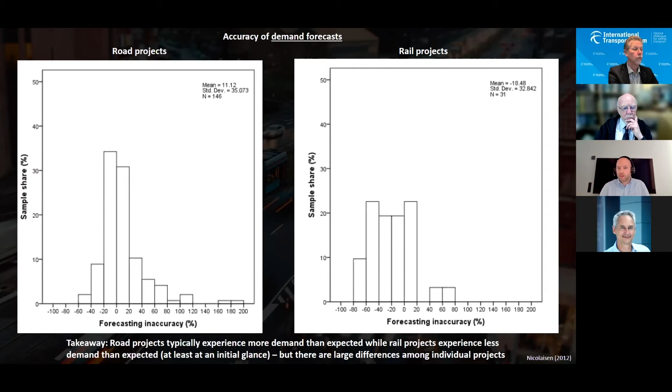And it should be obvious that makes it rather difficult to use the consequential environmental analysis and not least the cost-benefit analysis as a valid measure of decision-making on the economic impacts. For rail projects, the converse is true. The average is negative, indicating that there's on average less ridership on rail projects than we tend to forecast, but also here the deviation is rather large.

So some projects fare rather well, while other projects have as low as, I think, 20% was the worst project I encountered in my own studies, 20% ridership compared to forecast, which is obviously disastrous for the economic feasibility of such a project.

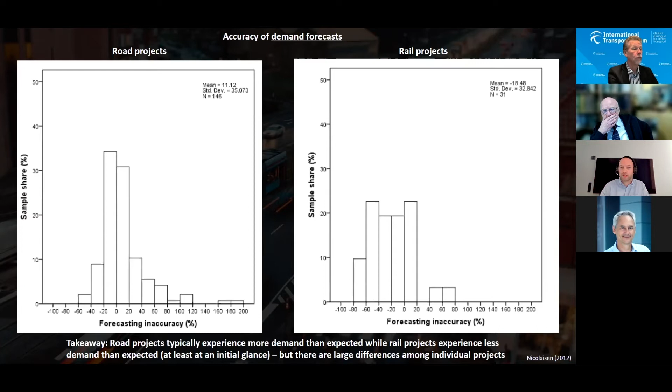One thing that I was quite interested in when I was doing my study, and which I haven't seen replicated in many other studies, is exactly what Tom was talking about. What about the counterfactual? Not that I can claim to have any detailed explanation of the causality of these forecasts, but from a range of projects that were either postponed, abandoned, or just not completed at the forecast target year, we had an opportunity to compare how accurate the forecasts are for the zero alternative or the no build alternatives.

And it turns out that opposite of the completed alternatives, we have a negative mean for those values, indicating that on average we have less traffic developing in the zero alternatives than the forecast actually shows. I think an obvious explanation is that we are not particularly good at assessing induced demand effects, since there is a tendency for more traffic to develop on roads after completion than expected, and conversely, less traffic on projects that are not completed.

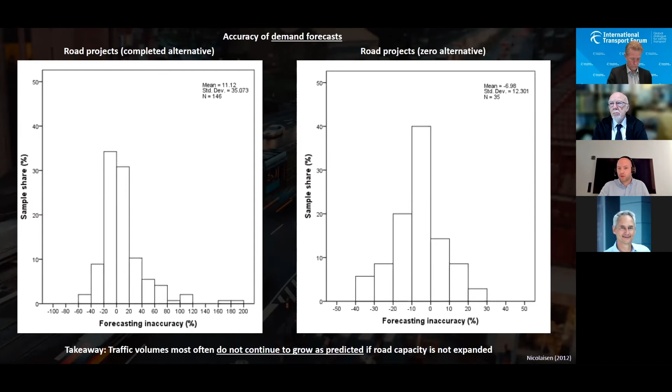I think the interesting part about all this inaccuracy or uncertainty, and the large deviations from expected values when we look at completed projects, is not so much the demand forecasts themselves, but what happens if we feed that into, as Morten was saying, a full ex-post evaluation of a project, which is, I should say, rather resource demanding.

But the UK Highways Agency has for a number of years had a program called the Post-Opening Project Evaluation of Major Projects Scheme, POPE in short, that has done exactly that. At least it did when I was last invested in the research portion of this.

And one of the things they've spent some time on is trying to redo the cost-benefit analysis with the outcome variables of projects. A sample from projects completed a decade ago is what you're seeing here, indicating that the travel time savings, by and large the dominant benefit factor of road construction, tend to deviate quite largely from the expected values. Only 18% of projects are actually within plus minus 15% of the expected travel time savings.

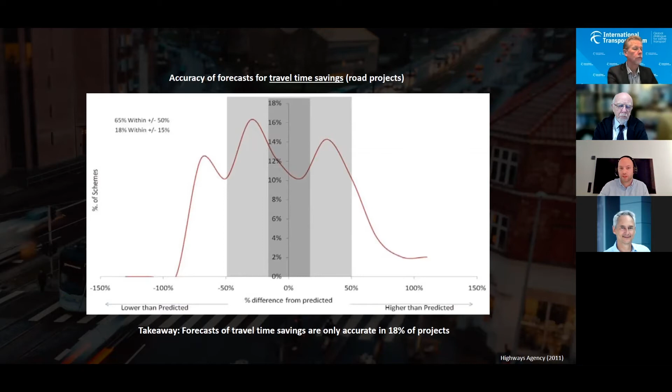Even 1/3 of the projects lie beyond plus minus 50%, which underpins the fact that these large deviations in travel demand forecasting also have quite a critical effect on the assessed feasibility of projects in economic terms. The same holds true for other types of impact variables.

Another important one when we're talking road infrastructure being accident reduction rates. I think this graph essentially goes to show that it's pretty difficult to use the assessed accident reduction rates from appraisal of projects ex ante to compare the viability of projects, given that many projects actually fail to achieve any reduction rate at all in terms of accident rates, despite it being perhaps one of the crucial elements for deciding to undertake the project.

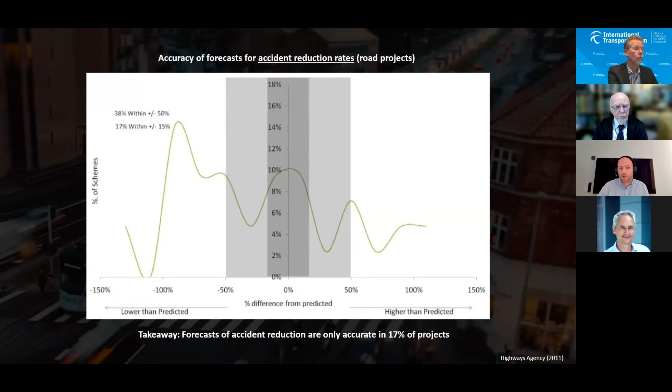A final sample from the UK Highways Agency meta-analysis from a decade ago is that all these sub-objectives that I think Morten was also touching upon, that are quite critical to at least local decision makers, often are also having various degrees of robustness when we compare them with the predicted values.

And my new role in local governance is, as Roger said, heading a team working with green mobility. So we are obviously quite interested in forecasting the greenhouse gas effects of various types of initiatives that we put forward to our policymakers. And sadly, that has proven to be, at least from the UK experience, the most difficult sub-objective to actually get accurate predictions for, making it rather difficult using travel demand forecasting as a basis of advising policymakers on how to best reduce greenhouse gas emissions in the transportation sector, on a project level at least.

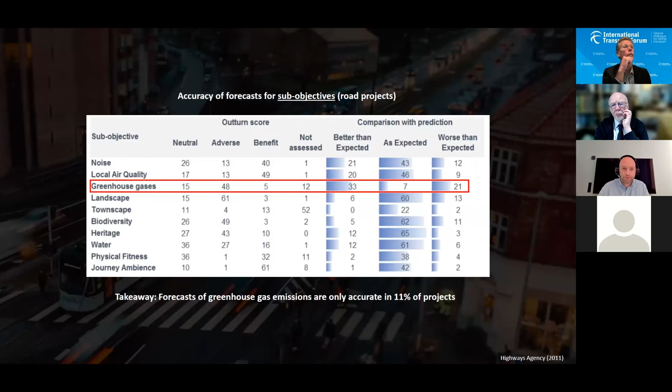Another thing that makes it tricky to utilize ex post evaluation results, whether some that you have conducted yourself or taken from academic or more practical studies, is that this initial rather simple measure of inaccuracy that I initially presented ends up proving difficult to utilize in practice. A simple reason for that is that often the prediction is made, let's say 2020 for a project, time goes by, the project opens, could be in 2030, but the target year for the forecast might not have explicitly had in mind any realistic opening year. That's typically the case for Danish rail projects, at least.

The target year is typically set for a year well in advance when you know there's likelihood of having a mature system and the project is likely to be finalized. It could be 5 years after the actual completion date. So a direct comparison of the forecast ridership and the outturn ridership is likely to result in a ridership shortfall simply due to the fact that you're measuring an opening year that's prior to the actual target year for the forecast. Could also be the other way around, in which case you'd be likely to have the opposite inaccuracy bias, you could say.

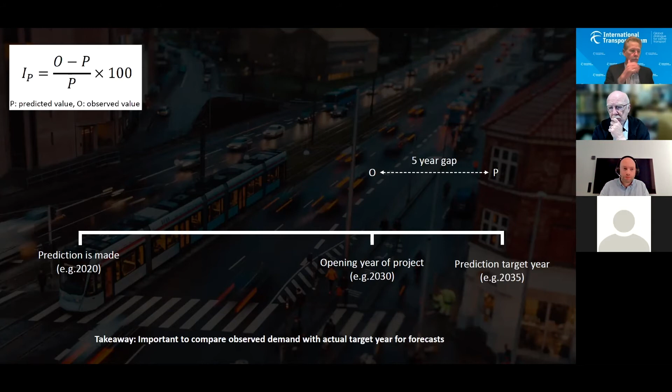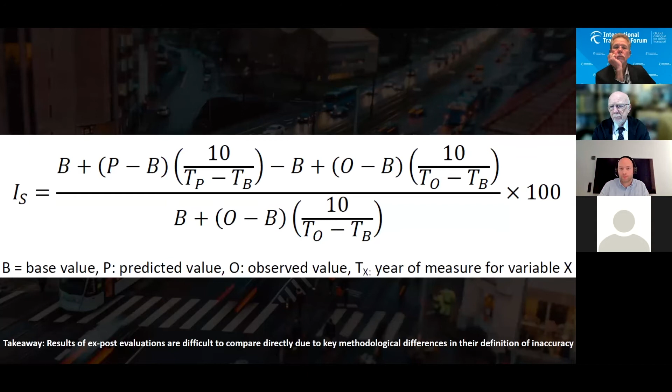The point of this is not to go into detail with any of these formulas. It's more to say, as Morten also hinted, that the experiences from one country or one study can be rather difficult to translate directly to projects that you find yourself being responsible for if you do not know or do not utilize the same measure of inaccuracy. And it is not always straightforward to even determine what measure of inaccuracy has been used. Remedies for these things is something I'll return to a bit later.

Another thing, as I think several people in the prior session before the break hinted at, is that ex-ante appraisal can be resource demanding, but ex-post appraisal can be equally resource demanding. So what often happens is that ex-post evaluations focus on ridership for a rail line on a specific segment or traffic on a road network on a specific segment.

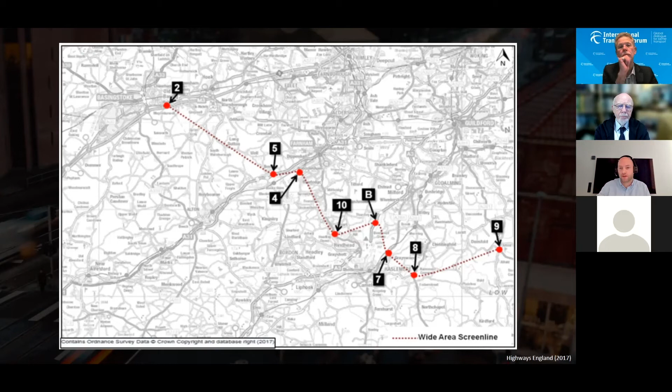But what ought to be done is essentially looking at, as in this case here, a screen line across a corridor. In this case, I believe it was a project on the A3 in the UK, looking at not only what is indicated as location B here, what happens on that specific segment of a road upgrade, but what happens on comparable corridor networks across the range of this corridor. And this is the comparison between expected and actual traffic on these different locations.

And I think what happens in many studies that do not use the screen line approach is that you end up with something that's indicated by yellow here. At location B, you had a pretty high induced demand effect of this road construction project. But when you start looking across the screen line, you notice that in total the effect on traffic in the wider area was actually not very drastic because it's simply a diversion of traffic to other modes.

And I think Morten was also hinting on this, that it's difficult to find evidence supporting that there's a large growth factor to these road infrastructure investments, simply because it's typically a competition between either local or regional authorities on attracting this growth.

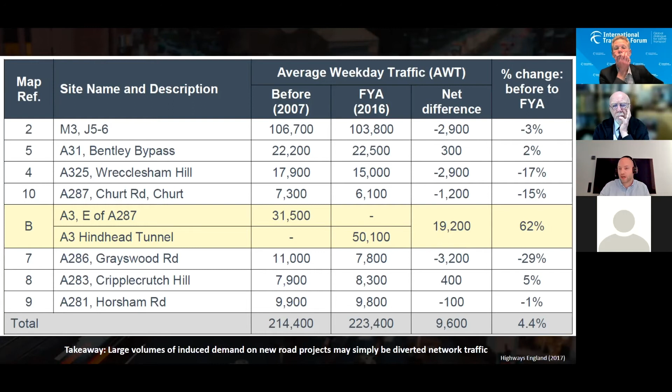The problem is that if you have studies that are comparing the inaccuracy of travel demand forecasting for road projects, you could utilize a project or a single corridor or a single segment approach and reach the conclusion that the travel forecast was largely underestimated by quite a drastic amount. But if you use a screen line approach, it might turn out that the forecast was pretty much spot on, or at least that it did not have the large amount of induced traffic that would otherwise be indicated.

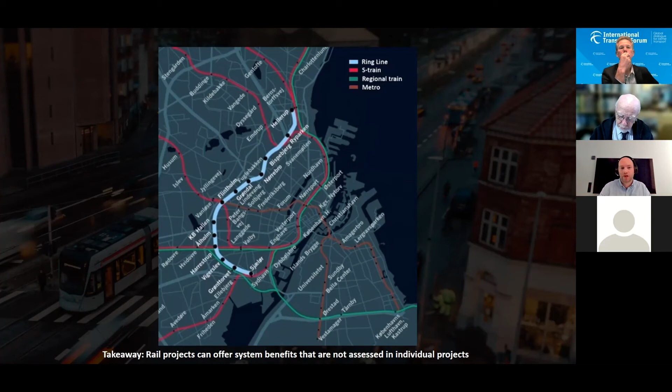But if you look across overall service levels in the Copenhagen rail system, including the metro system, it was a massive upgrade simply because the amount of alleviation on the passenger stress on these other lines was still sufficient that they are now operating at a much higher service level, much higher levels of reliability. So I think an assessment of the overall impacts of such a project would be quite positive, but a simple measure of just the ridership impacts and the financial viability of the corridor itself that was upgraded would turn out to be rather negative.

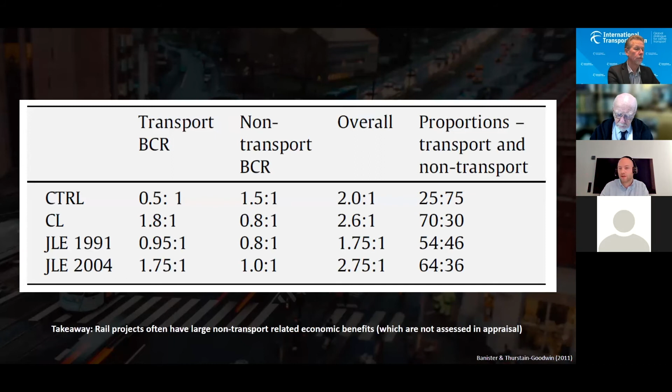And I think that's something that other speakers have addressed, so I won't speak more into that. But obviously, it's important for adjustments to the way we do ex-ante appraisal. I think Morten also hinted on this, that when you're talking about rail lines, they could be exceptionally complicated projects because they depend on so much more than just the infrastructure, service levels, among others.

And after the project was built, it turned out the ridership is, I think, 8% on this station compared to forecast. But when you look at Kildedal Station today, you'll see that there simply has been more or less no development investment compared to what was forecast.

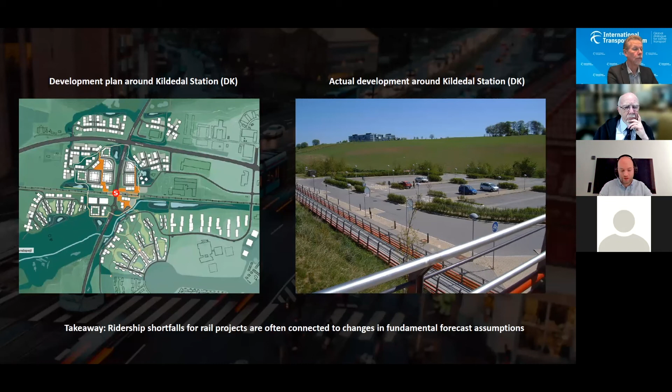We are running the same risk with a recent light rail completion as an expansion, you could say, of a high capacity network we're doing here in Aarhus. This is just north of the city, essentially a station placed in a greenfield development. Right now, we are finalizing plans for essentially an entire new city up here. But we are still crucially dependent on nothing going wrong, you could say, in the investment discussion with private real estate developers in this area.

So we have the light rail, we have the station, we have all the sort of network facilities that need to be there, but we still don't know if the investment will pay off. And obviously, right now, ridership is nowhere near the forecast, and I think politically you are quite okay with that. But what happens 5-10 years from now is going to be what is really interesting. So again, reiterating Morten's point: when do you measure whether a project has been a success or not?

It can be rather difficult, especially at a local level for a project like this that has state co-financing, because someone is definitely looking at the money that has been pooled to a project like this locally from a state level, saying that soon this needs to turn out to be a success. Otherwise, we might not get funding for expansion lines of this kind of network upgrades. And I think that plays on many levels, this impact of land use development.

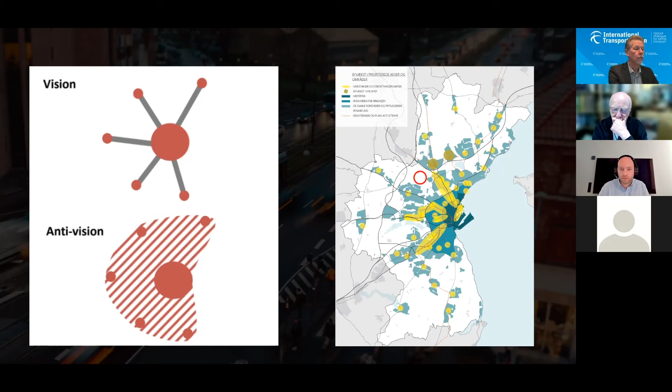I don't know how I'm doing on time, Roger, so if we're facing sort of the end of my allotted time slot, feel free to speak up. I can summarize rather quickly some of the points. I just want to... You've got another 5 minutes.

Great. Then I can just show you some examples of more practically, maybe not so much how do we utilize ex post evaluation, but how can you make different frameworks that will allow your ex ante appraisal to point in different directions.

But because, as Morten has already hinted, there's a rather large planning phase until actual construction can be undertaken, if the project is even approved, and also because we knew this was going to be a rather large intervention in the traffic system, what was done as an interim solution was to say, well, we want to expand the traffic corridor dimension here. So we knocked over some housing.

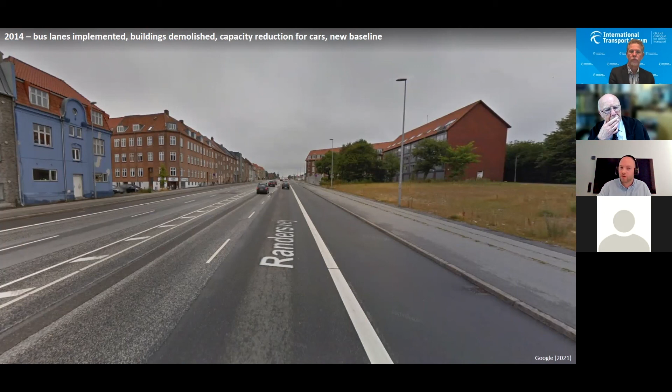On the right side of this picture, we expanded the road, we added dedicated bus lanes to at least have some sort of transfer system into this high capacity rail system that we were building, which happened prior to any conclusion on the cost benefit analysis of the light rail itself, including the co-financing from national level. So this became the new baseline, even though the only reason we undertook this was to prepare for the light rail itself.

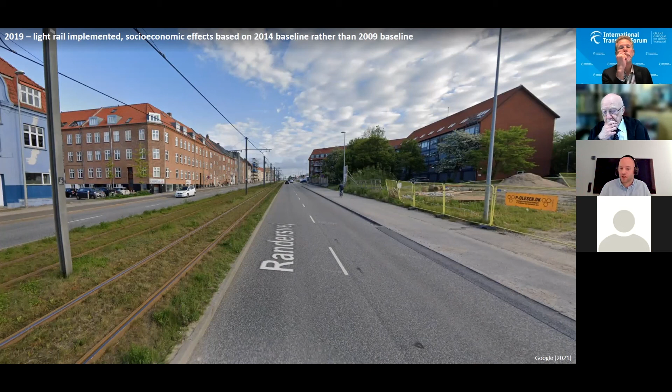What happens afterwards is that now the buildings are demolished, the road space is expanded, we have our light rail, which we're quite happy with, but the economic evaluation of this project turned out to be very positive, simply because we compared with the system where we'd already knocked over buildings, we'd already expanded the roadway, so all the cost associated with that was taken care of as a local expense, and also all the impediments for car drivers that we were enforcing, not least in signaling, were already taken into account.

So the punishment, you could say, that you face both in construction costs for this part of the project and the detrimental effects to the car drivers were already taken care of in this project. But had the light rail itself been compared to the original section you see here, you'd probably have a project appraisal that had fared much worse.

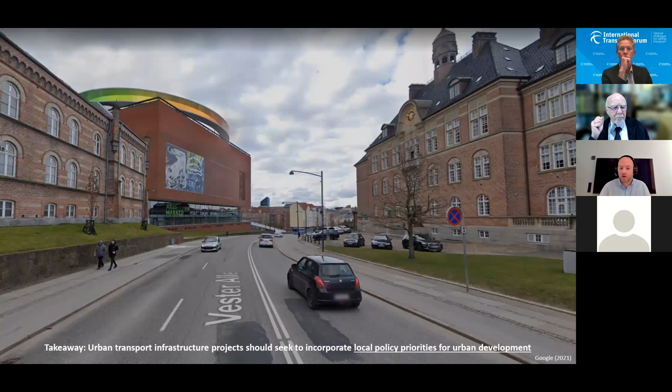And I think we find ourselves in a current situation, a contemporary appraisal of a new light rail expansion on a site like this, where we're not trying to game the system in any way, just trying to say, well, we have an urban development site here that we need to somehow offer a new transportation system to, but we are probably 8 years ahead of actually going into the ground, building new rail here.

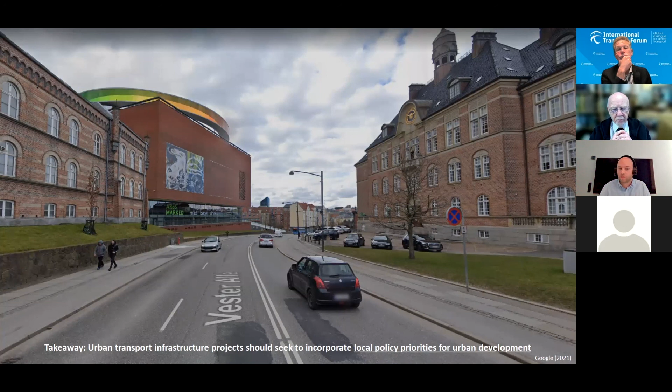So we're considering doing more or less the same here, expanding the roadway, adding high capacity buses, but we also know at the same time that that will just end up showing a much higher feasibility for the light rail project itself. And I think it's difficult to pinpoint when is actually the good baseline for national interest in terms of investing in this project.

And I think the 5 minutes are probably soon up, or at least I think the discussion is what has been most fruitful in these segments. So the last thing I'd like to pinpoint is that resource allocation needs to be dedicated. It needs to be mandatory if, as Roger hinted at initially, ex-post evaluation is to have an important relevance for the way we do ex-ante appraisal and the way we do decision making.